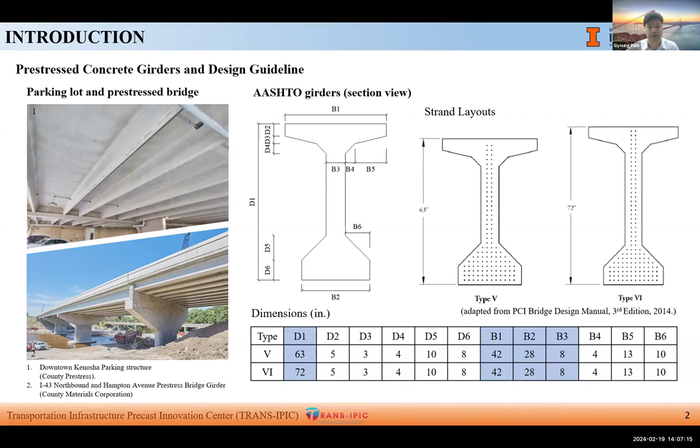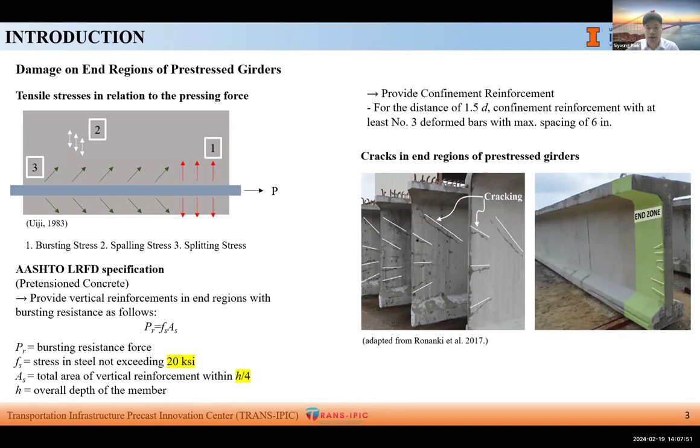However, even with securing this specification, we can still see inclined and horizontal cracks in the end region of pre-stressed girders. Several studies were conducted to mitigate end region cracking. The following 4 methods were developed as a solution.

First is to adjust the draping angle, and second is debonding strands with partial shielding, such as unbonded strands. Both methods showed some effect on the end region, by up to 20% less damage, but there was a reduction in shear capacity when conducting 2-point load experiments.

Third is vertical post-tensioning, and fourth is using vertical threaded rods. These methods also presented some effect on crack mitigation. However, extra steel components or bulky rods were required, resulting in steel congestion, especially in the end region.

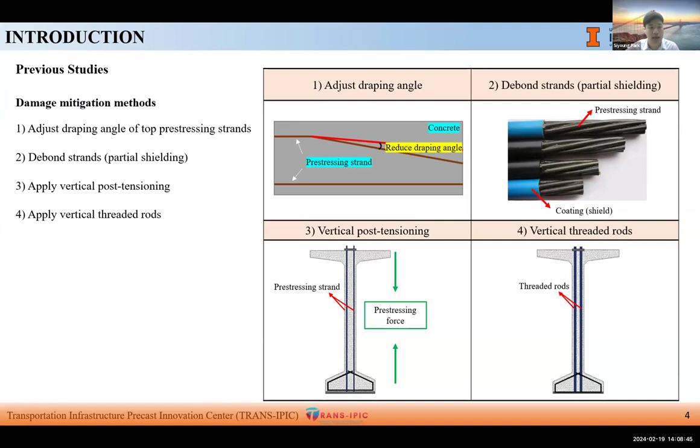In this study, the active confinement effect of SMA as a pre-stressing force was used for crack mitigation. It was thought that replacing steel stirrups with SMA stirrups can relieve crack damage by confining force, and even reduce steel congestion by using a smaller number of end region stirrups with larger spacing.

Nickel titanium niobium SMA alloy type was used for numerical analysis, which has a wide range of thermal hysteresis, resulting in beneficial effect for application in the civil engineering field.

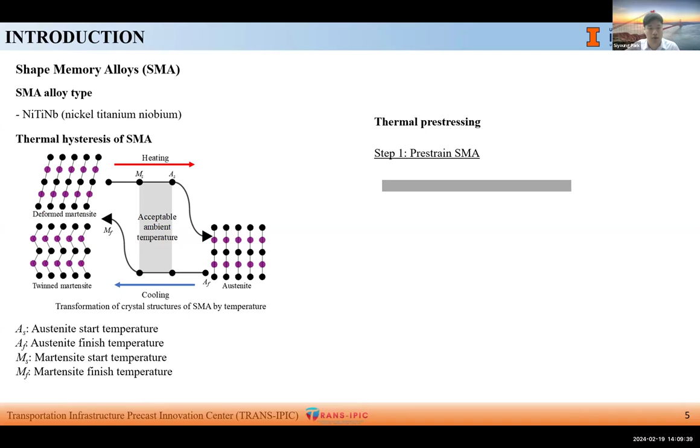Thermal pre-stressing is done by using the shape memory effect of SMA. This is where SMA tries to recover its original shape when heated up beyond the austenite temperature. Using this feature, as shown in the animation, we pre-strain the SMA and anchor it.

After that, by heating with direct heating or electric method, as the SMA is fixed to the anchor, it cannot recover to its original shape, building recovery stress. This confining or pre-stressing force would be transferred to concrete, limiting cracks.

Usually, direct heating is done by torch heating or placing in a heating chamber, and electric activation is done by applying low voltage activation.

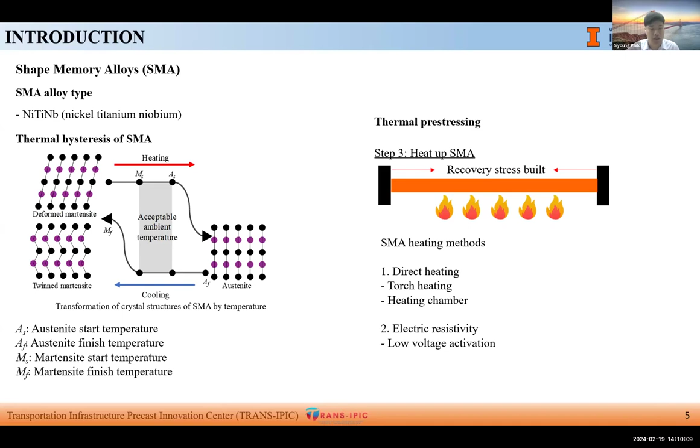Among diverse SMA types, nickel titanium niobium SMA was selected for the analysis. Nickel titanium niobium is composed of reversible particles nickel titanium and irreversible niobium.

This is that when the SMA is deformed and heated up, nickel titanium particles begin to recover, whereas niobium hinders its recovery. This reaction widens the width of thermal hysteresis, making ambient temperature upper than the martensite start temperature. While thermal hysteresis would maintain the recovery stress even in ambient temperature or below minus 70 degrees Fahrenheit, being capable for use in diverse applications.

With these features of SMA, it is already used in diverse engineering fields, including aerospace, robotics, cardiovascular science, and mechanical engineering fields. Representative applications are in airplane engine components, SMA actuators and pumps, and also artificial heart devices.

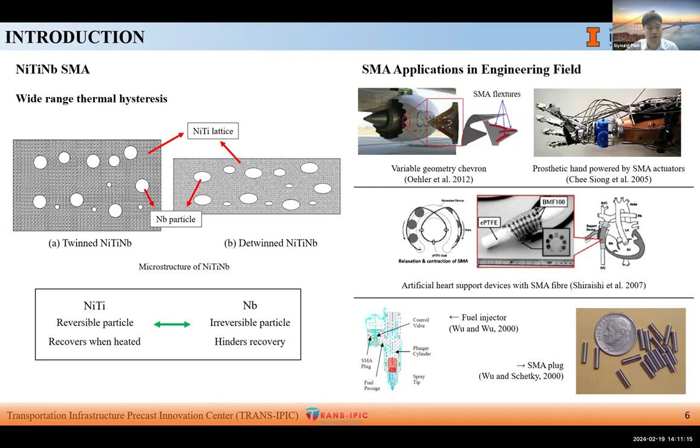Before applying SMAs, to verify the numerical model, a BT72 girder bridge model was designed based on the PCI bridge design manual. The length of the bridge was designed as 120 feet with end stirrups up to 18 inches, 36 straight pre-stressing strands and 12 draped pre-stressing strands were designed with 7 wire strands in a diameter of 0.5 inches, applying pre-stress of 202.5 KSI. All these stirrups and confinement reinforcement satisfy the recommendation of AASHTO LRFD specification.

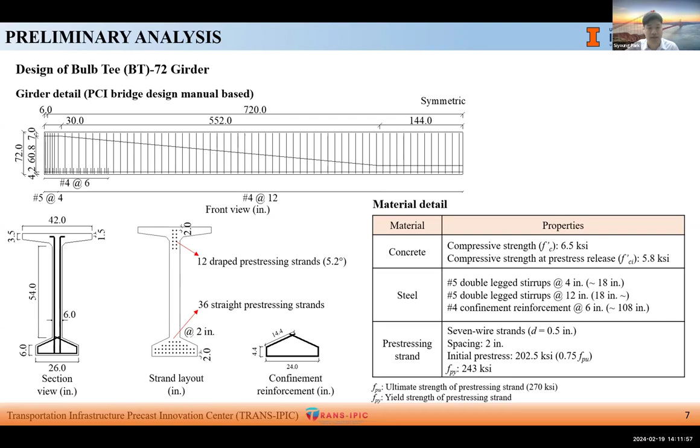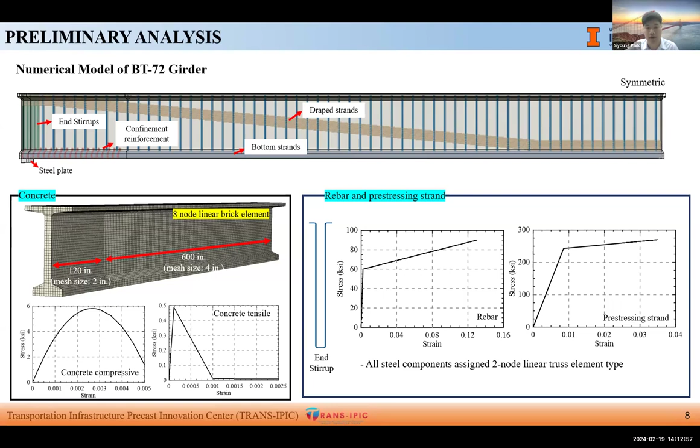Now, to evaluate the damage on the BT72 girder, the maximum principal strain of the end region was analyzed after pre-stress release. Red areas are those thought to be fully cracked. This was set based on twice the cracking strain value, which was also calculated based on ACI. As the pre-stress level increased, we can see crack regions developing in the web and flange areas.

When the pre-stress level was 101.3 KSI, there were only minor cracks on the surface of the web and flange areas. Still, the web-flange connection part was most damaged, with the crack shape in Y and horizontal form. As the pre-stress release level went up to 151.9 KSI, inclined cracks at the top web also appeared, evaluated to result from the draped pre-stressing strands.

The bottom flange was almost fully cracked in the end region where horizontal pre-stressing strands run through, and web splitting cracks also developed. At the end face with pre-stress of 202.5 KSI, the web region was cracked more than 50%, with a vivid cracking pattern of inclined, web splitting, and Y shape cracks.

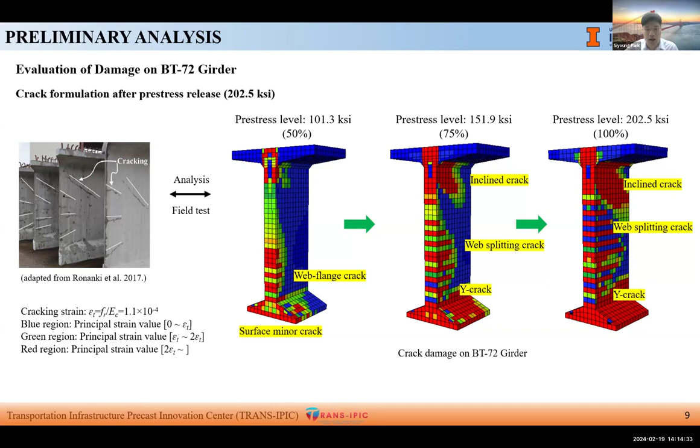Although this numerical model followed the AASHTO guideline, we can still see that end region cracking can be a problem. Also, by comparing to the field test, although the model is not the same, the cracking pattern was similar, verifying the numerical model.

The stress distribution along the vertical reinforcements at end regions was also evaluated to see if the BT72 girder satisfied the AASHTO guideline. Although the bursting resistance was satisfied, showing 2.1% against the code's 4%, the outermost stirrup exceeded the value in the middle and bottom of the girder, with values of 23.8, 24.1, and 20.2 KSI.

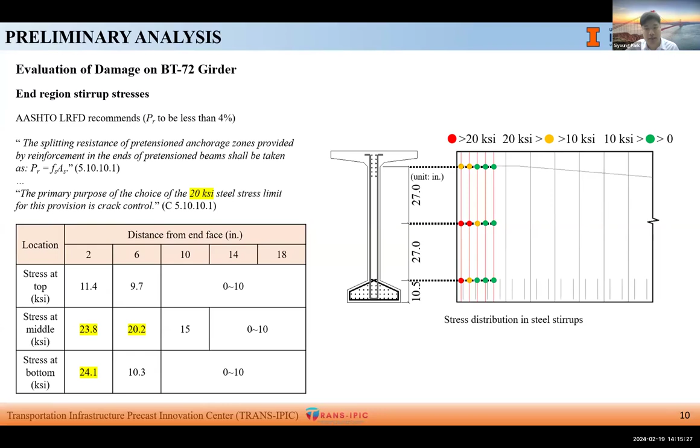However, after that, the stress diminished quickly, and after the third stirrup, the stress reached below 10 KSI. We can see that most stresses are distributed within the third layer, implying that these regions are really vulnerable to cracks. As a result, SMAs were placed within the third layer in further analysis.

Now, to start with the SMA model, whereas steel stirrups were designed in U-shape, SMA stirrups were designed in L-shape to mitigate stress concentration by pre-stress at the bottom flange. 3 types of SMA models were designed by changing the number of end stirrups: 5S2, 5S1, and 3S1 are cases with SMA stirrups. 5S2 had 5 end stirrups with 2 SMA stirrups at the end region, and the volume ratio was 1.66%.

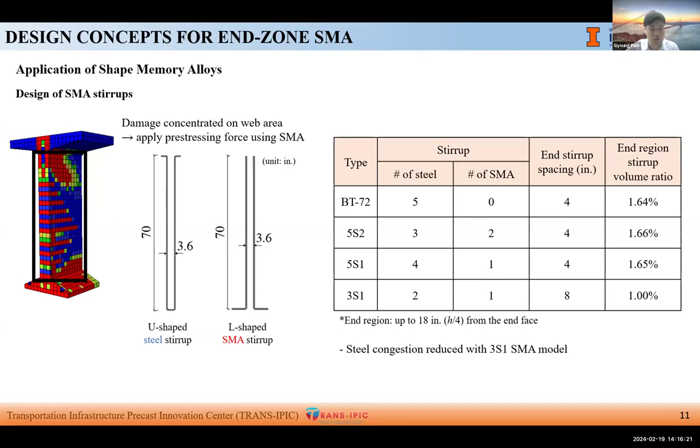5S1 also had 5 end stirrups, but with only a single SMA stirrup, and the volume ratio was 1.65%. Lastly, 3S1 had 3 end stirrups with only 1 SMA stirrup and a volume ratio of 1.0%. We can see that from 5S2 to 3S1, the volume ratio is decreasing with less amount of end stirrups.

To graphically see this, in the case of 5S2, 2 SMA stirrups were placed to mitigate the crack damage shown in the BT72 case. After that, the number of SMA stirrups was reduced to 1 to see the effect with a smaller amount of SMA. It would be best if we could replace a small number of SMA while sufficiently relieving damage. After that, the number of end region stirrups was reduced to 3 with 1 SMA stirrup, to reduce steel usage while limiting crack propagation.

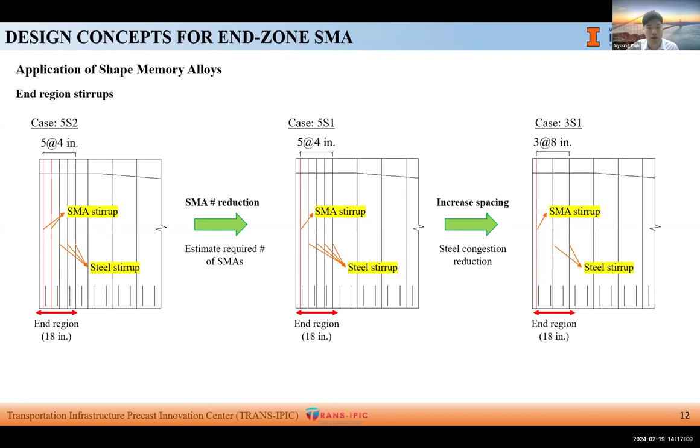In total, the original steel case and the three SMA cases were compared in terms of cracked area, cracked width, principal strain, and stress distribution in end stirrups.

The effect of SMA was analyzed in terms of cracked area at the web region. Most of the pre-stressing effect was with horizontal cracks, and there was slight effect with inclined cracks. By calculating the cracked elements, the original BT72 model had 54.2% cracked area, whereas each SMA model had 23.7, 33.3, and 33.4% cracked areas.

Placing 2 SMA stirrups had the best effect, but with a single SMA, it was also effective. If we observe the web center region only, most of the horizontal cracks were diminished even by applying just 1 single SMA stirrup.

Even with larger spacing of 8 inches, this was similar. It can be thought that the difference of cracked area of 23.7% to 33.3% was in inclined cracked area, and since there was no difference between 5S1 and 3S1, it was promising that SMA could truly relieve both crack propagation and steel congestion.

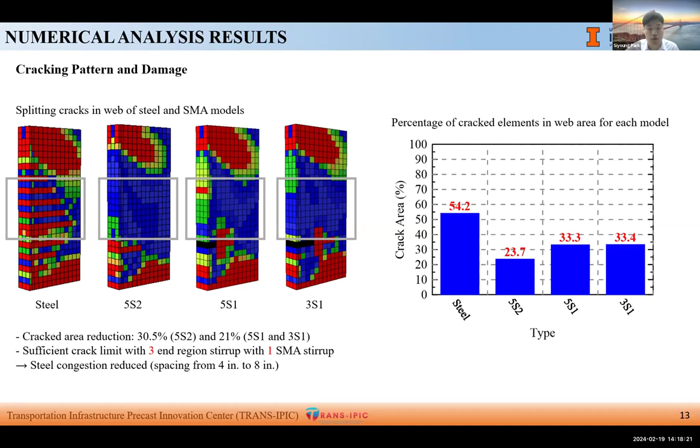Now to compare the crack width in each model, at the surface of BT72, the crack width exceeded 0.007 inches until approximately 0.75 inches. In ACI 224R, it recommends crack width to be below 0.007 inches to resist deicing chemicals in reinforced concrete under service loads. As generally, clear cover of reinforced concrete, and also for this model, is taken as 0.5 to 0.75 inches, this could bring negative influence to girders by steel corrosion.

However, with replacing SMAs, the crack width reduced to below 0.005 inches at the surface, and after passing the SMA stirrup at a distance of 2 inches, it was nearly sealed. With analyzing cracked area and crack width, we could find that applying SMA in pre-tension girders could prevent extensive cracking and improve serviceability.

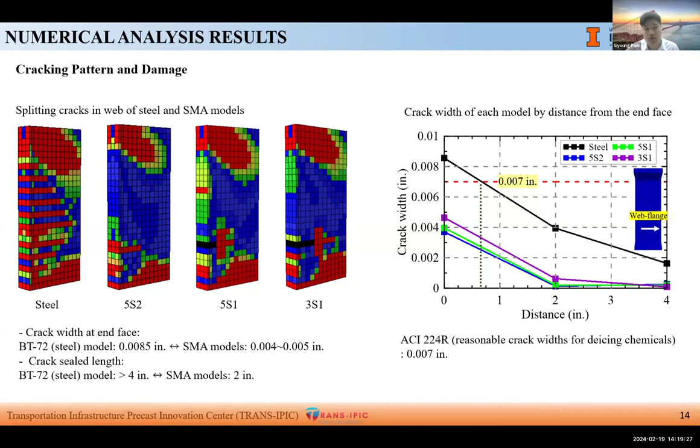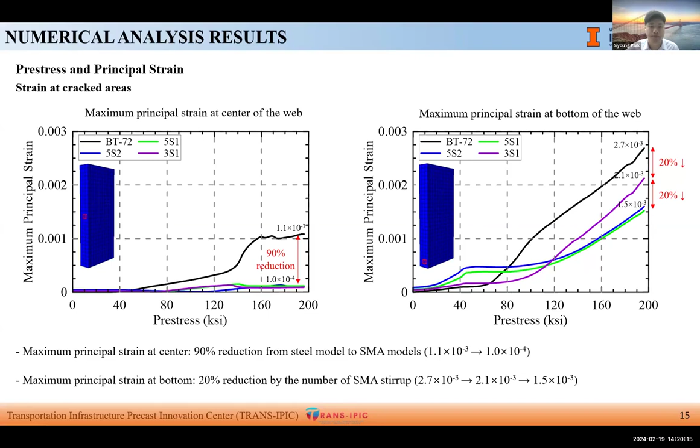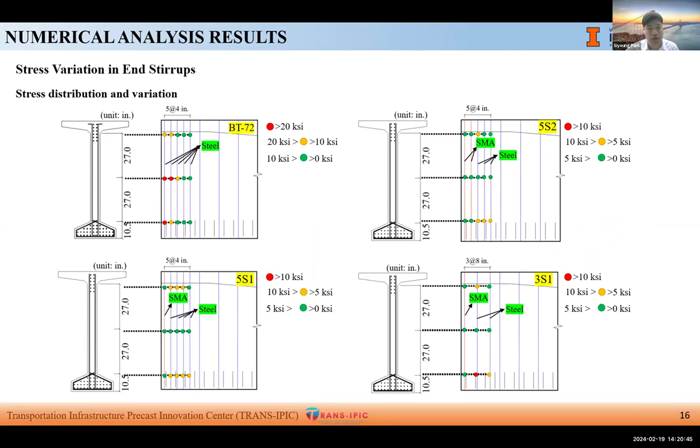Finally, by inspecting stress distribution and variation within end stirrups, the variation of stresses with SMA models were mostly below 10 KSI. The maximum stress variation was at the 3S1 case with 10.4 KSI due to its large spacing of 8 inches. Still, the value was under 20 KSI and even lower than stress generated in the BT72 model at equal locations. As per AASHTO codes, the demand of stirrups at the end region can be reduced with using SMA stirrups.

Now is the ongoing experimental program that we are working on. To validate the effect of SMA bars at end regions, a scaled down AASHTO type 1 I-beam was set as a reference model, placing a single pre-stressing strand at the web region. Web width was designed to be 3 inches, and pre-stress value was also set as 202.5 KSI. By comparing steel and SMA stirrup models, we are expecting crack mitigation and possibly future load tests can be done.

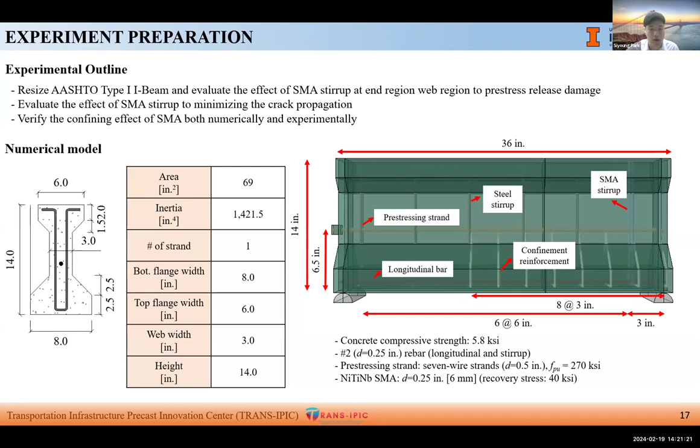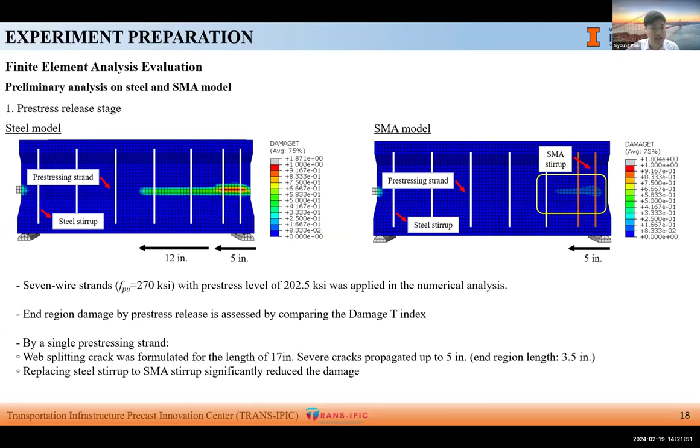Preliminary numerical analysis was performed in the scaled-down model as seen in the figures. Focusing on the crack at the web, we could see significant effect of crack mitigation in length and width by applying only 2 SMA stirrups at the end region. By referring to the results, the SMA effect was proven, and we are now in progress for experiments with diversifying variables such as number of SMA stirrups, SMA activation method, and the location of SMA stirrups.

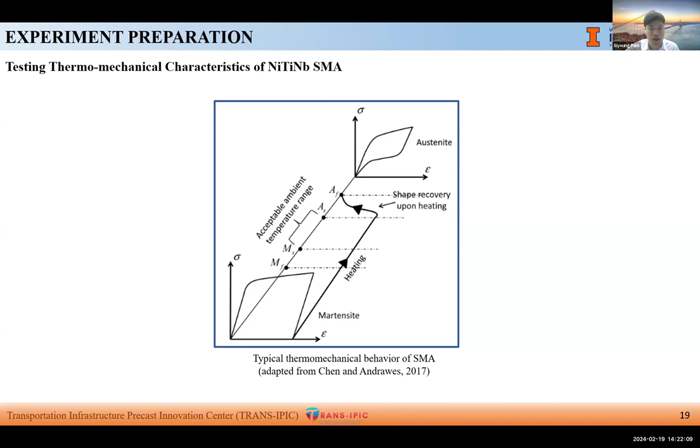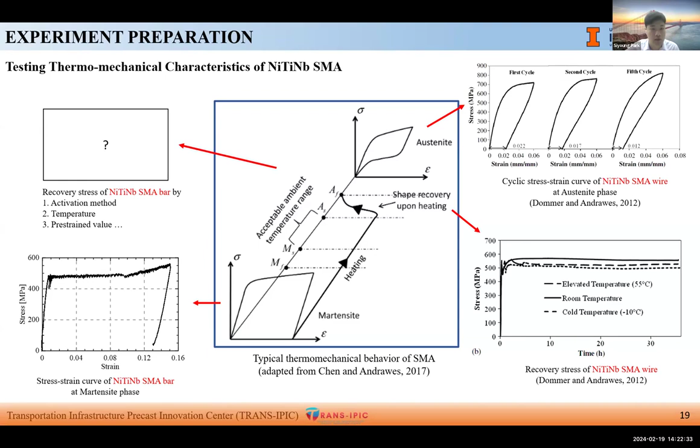The thermomechanical characteristics of nickel titanium niobium SMA is also under investigation. As SMA has different attributes by temperature, monotonic and cyclic testing are in progress. There was a previous study of nickel titanium niobium SMA wire in austenite phase in terms of pre-straining and activating. Now we are focusing on the martensite phase, for early activation from martensite phase to austenite phase. Activation method, temperature, and pre-strain value can be variables for determining the recovery stress, which should have an effect on the concrete, so these studies are going on.

To summarize, replacing steel stirrups with nickel titanium niobium SMA stirrups reduced crack area in the web by up to 55%. Horizontal cracks were mostly eliminated by pre-stress force of SMA stirrups. Single SMA stirrup also showed effect on crack mitigation while alleviating steel congestion issues. 20 to 40% of maximum principal strain was reduced by SMA stirrups. Crack width was limited under 0.007 inches by SMA stirrups, and experiments will be done to verify the numerical analysis results and investigate the thermomechanical characteristics of nickel titanium niobium SMA.

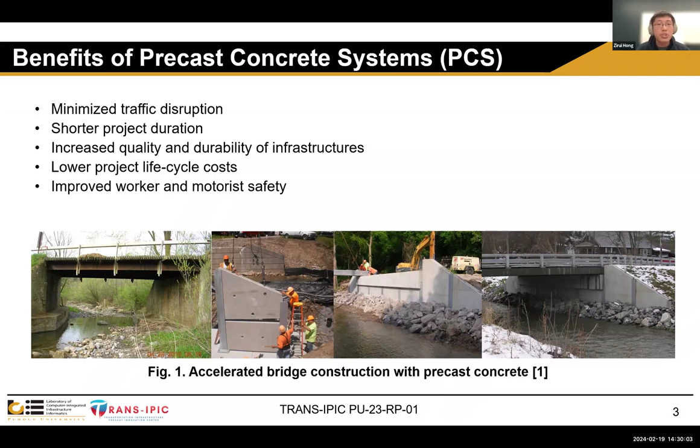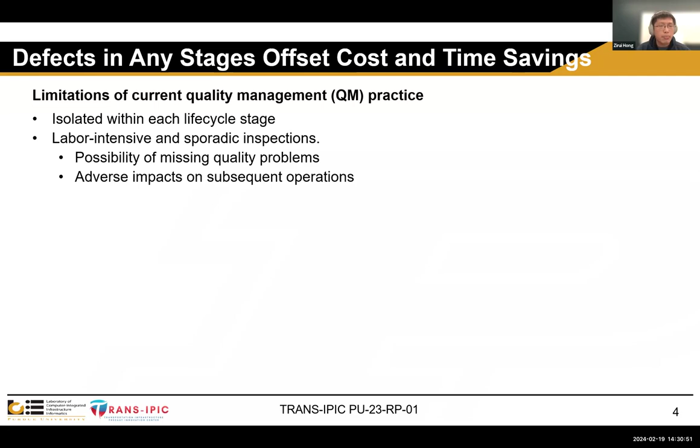However, the defects that occur in any project life cycle stage can offset the mentioned cost and time savings. The current quality management practice is limited in dealing with those potential defects in mainly two aspects. First, the current practice is isolated within each lifecycle stage, and data loss can happen when the project moves to the next stage. Second, the current practice heavily relies on labor-intensive and sporadic inspections, which could miss important quality problems.

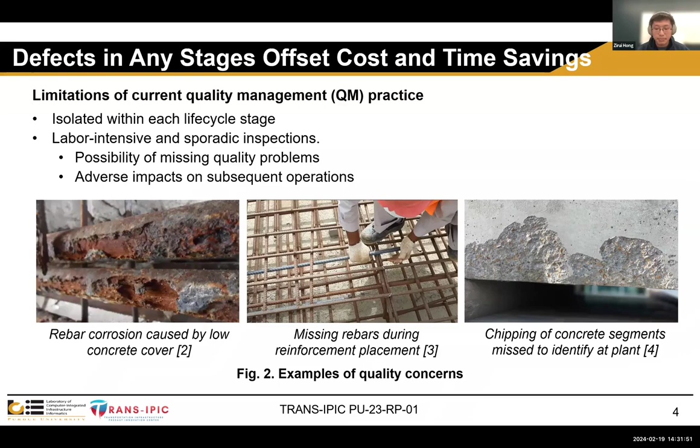So the limitation of the current QM practice reveals a critical need for a holistic quality management for PCS from a life cycle perspective. And BIM is considered as a solution for this holistic PCS QM. As we all know, building information modeling is a promising technology to facilitate information communication.

As we can see in this figure 3, the traditional quality management practice can experience data loss during project stage transitioning, and BIM can address the problem with its standard storage of data and seamless exchange of information or knowledge. With the progression of the project, it can enable a continuous accumulation of quality knowledge for quality management decision making. However, we should know that BIM only works as a data communication hub, but doesn't take care of the data collection part.

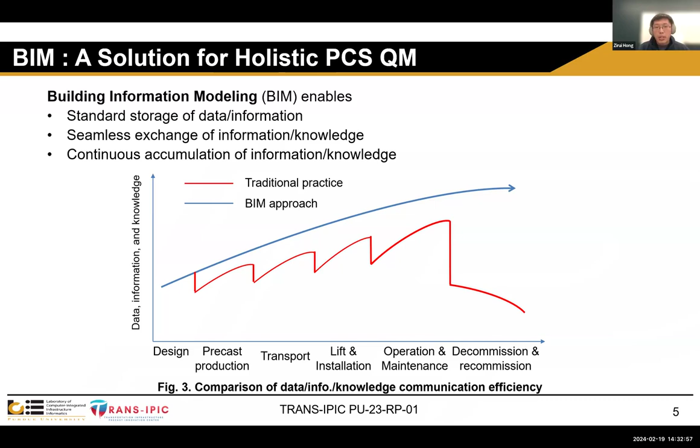So that is the place where sensing technologies come into play. Using sensing technologies such as the laser scanner and the ground penetrating radar can automate the laborious inspection tasks, which could reduce the possibility of missing those quality problems. It can also help improve worker safety by not exposing the workers to physical hazards.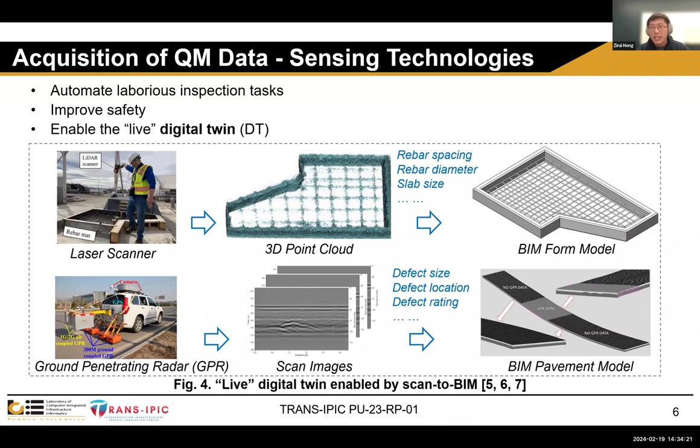By combining BIM and sensing technologies, the idea of scan-to-BIM can let us achieve a live digital twin of the transportation infrastructure for intelligent and effective quality management. Taking the laser scanner as an example, we can use it to collect 3D point cloud data of the forms and the rebar mats, and we can use algorithms to extract the dimensional data of these elements to analyze dimensional tolerance, and store this data to an up-to-date BIM model as a digital twin for the PCS QM.

Based on this background, our overarching goal of this project is to develop, validate, and test a holistic quality management framework as a model for precast construction of transportation infrastructure. As you can see in this figure 5, we can utilize BIM, sensing technologies, and deep learning algorithms to generate a live digital twin of the infrastructure for continuous monitoring of the quality.

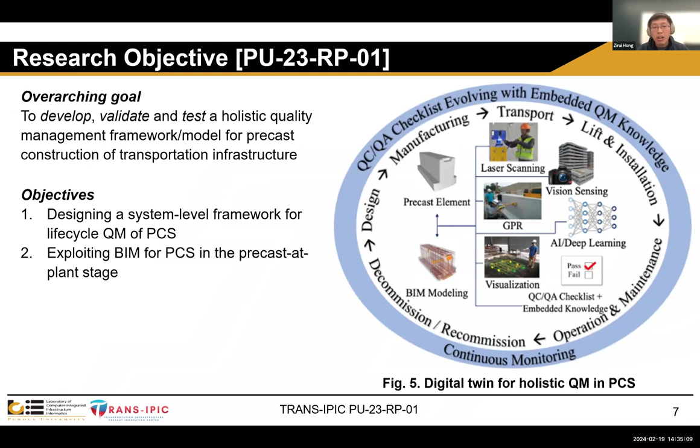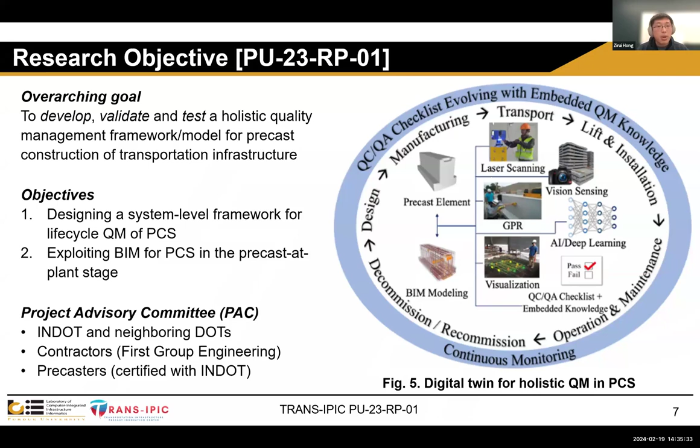To achieve the goal, we break it down into two objectives. First, we design a system level framework for lifecycle QM of PCS. Second, we exploit BIM for PCS at the precast plant stage. In this project, we established a project advisory committee, composed of people from INDOT, contractors, and precasters, to help us disseminate the project findings into practice.

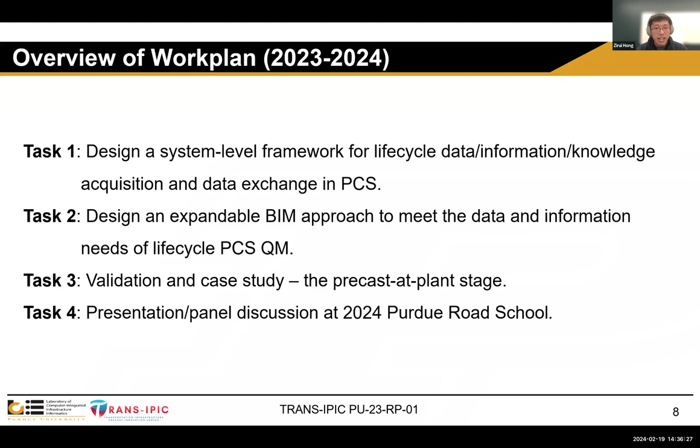This slide shows an overview of our project work plan. In task 1, we will design a system level framework for lifecycle data acquisition and data exchange in PCS. In task 2, an expandable BIM approach is designed to meet the data and information needs of lifecycle PCS QM. We will validate the design framework and approach using a case study targeting the precast at plant stage. We will also hold a panel discussion at the 2024 Purdue Road School to exchange ideas, share project findings, and hear from experienced researchers and practitioners in the field.

In the next slides, I will show you more details about tasks 1 and 2 and how we implement them. In task 1, we investigate and compare both the current practice of PCS QM and also the state of the art of BIM practice in PCS QM. For the current practice, we focus on these critical aspects.

For example, the timing of the QC/QA tasks, the involved stakeholders, the data collection methods they use, the tools, data needs, formats, and so on and so forth. And for the BIM practice, we look into how BIM changes the traditional work process and data flow, as well as how we can integrate sensing technologies into the workflow to improve the QM work.

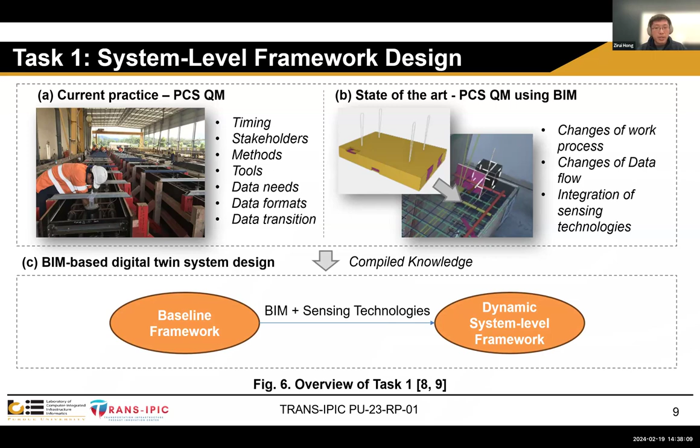We compile all the knowledge into two frameworks. We have the baseline framework, which describes the workflow, the work process of the current practice. Then based on this baseline framework, we integrate BIM and sensing technologies and establish a dynamic system level framework for the digital twin system design. Let me show you more details about how this dynamic system level framework looks like.

As you can see in figure 7, it shows this dynamic system level framework and how it is characterized by the expandable BIM models with the development of the project. So we probably could not have too much quality information about a PC column at the production stage, but with the progression of the project, the level of development of the BIM models increases, and we could have more as-is information.

For example, the physical damage status of the column come in and collected those data in the O&M stage.

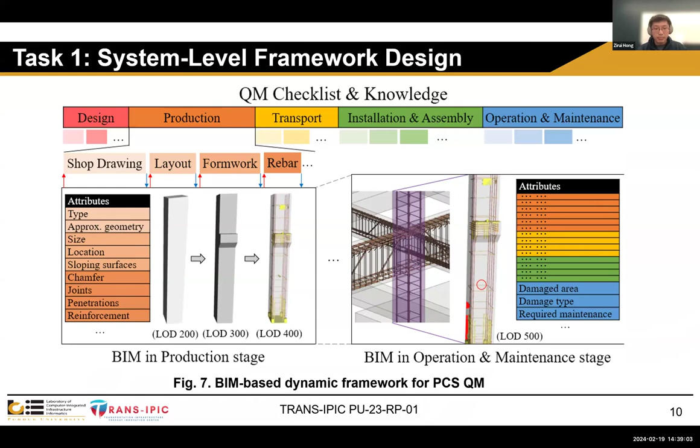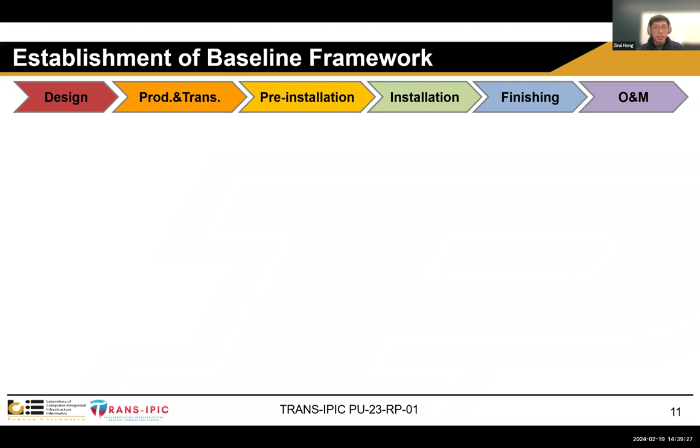In our project, we first target how to establish a baseline framework. We take the precast concrete pavement system as an example and examine the latest manuals and specifications to compile the current practice knowledge. We organize this knowledge by following this breakdown structure. For each life cycle stage, we identified the QC/QA tasks and the timing and responsible parties. Then we look into the specific checklists and check items, and organize those check items in a format of object attribute structure for the later BIM template design purpose.

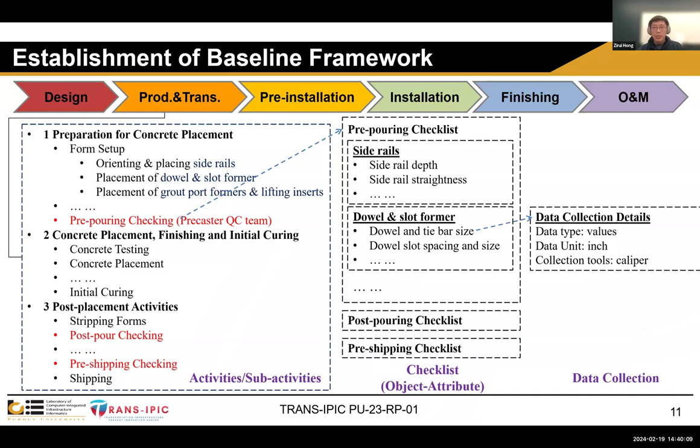We also look into the data collection details for each check item. For example, what's the data type, data unit, and collection tools.

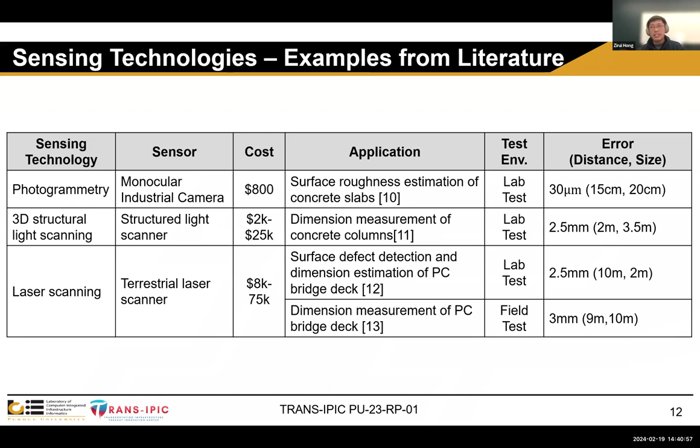To investigate the state-of-the-art of BIM practice, we comprehensively reviewed existing sensing technologies used for automated inspection tasks. We focus on important aspects to understand how BIM can change the traditional inspection workflow. For example, the sensors, the technology used, the money cost, and the application in inspection, the tested environment, and most importantly, the measurement accuracy of these sensing technologies.

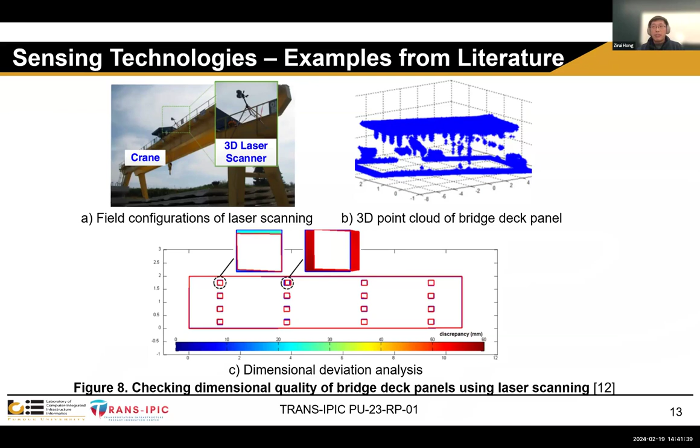Here's an example, a graphical illustration of one of the sensing technologies: we can utilize laser scanning to check the dimensional quality of bridge deck panels. We can collect the 3D point cloud data of those panels on the field and compare it with the as-designed models to conduct a dimensional deviation analysis and determine whether the dimensional tolerance is satisfied or not.

In task 2, we focus on designing expandable BIM templates using IFC. IFC refers to Industry Foundation Classes, which is an open international standard to digitally communicate data in the AEC industry.

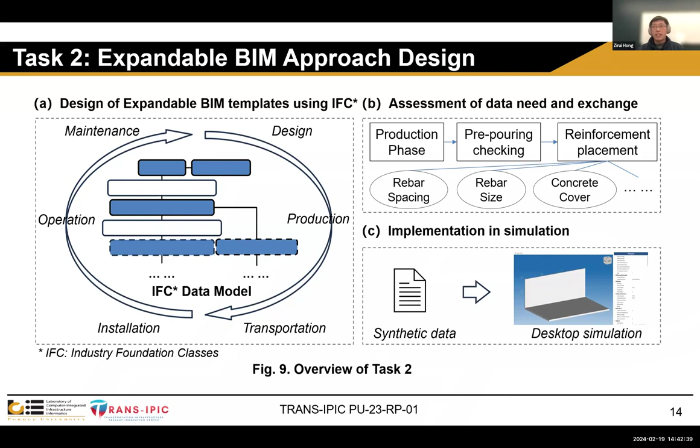Our goal is to have an expandable IFC data model that can accumulate quality data throughout the life cycle of the project. During the design, we will assess the data needs and exchange to improve the design, and we will implement our design with synthetic data in a desktop simulation, which involves the production operations at the plant.

In our project, we aim to answer two key research questions regarding the IFC representation. First, how to extend the IFC data schema to describe diverse PCS-QM concepts. Second, how to design IFC data structure to document the quality management history and support downstream analysis.

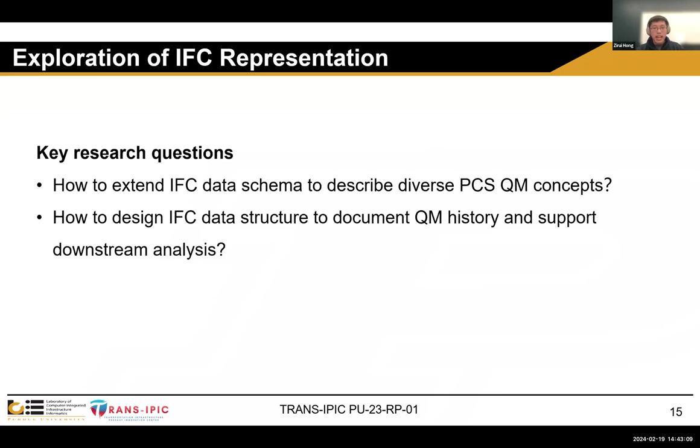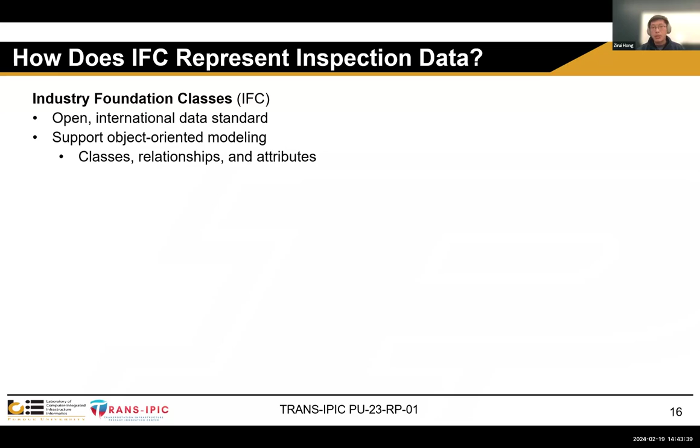This slide explains how IFC can represent the inspection data. IFC, as I mentioned, is an open international data standard, and it describes concepts in an object-oriented manner. In other words, it uses classes, relationships, and attributes to describe those concepts. In IFC data schema, it has numerous built-in entities: class entities, relationship entities, and attribute entities.

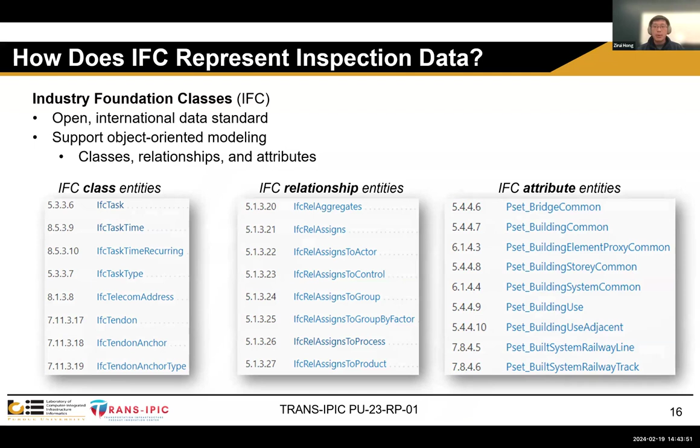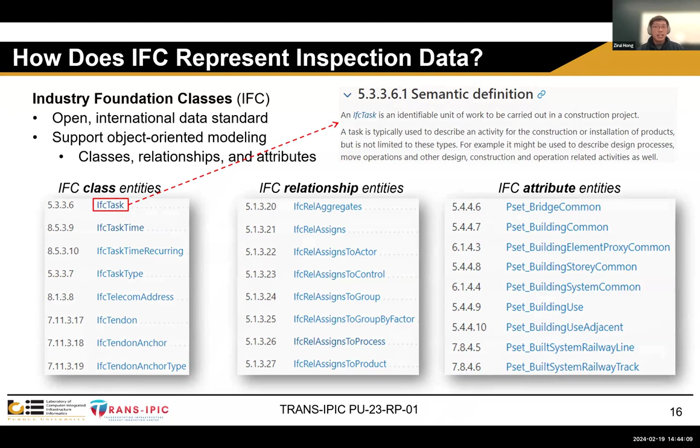Each entity has its own specific defined semantics for us to describe specific concepts, and we can find that information in the existing online IFC specifications. Let me give you an example to understand how we can represent a real-world inspection scenario using IFC.

For example, we could have a QC inspector conducting an inspection task for the post-pour checking of the PC elements at the plant at a specific time. After the inspection, he or she could find a few cracks on specific slabs, and the inspector has to record the properties of those cracks. For example, the properties can include width, location, and severity, etc. The inspection results need to be summarized.

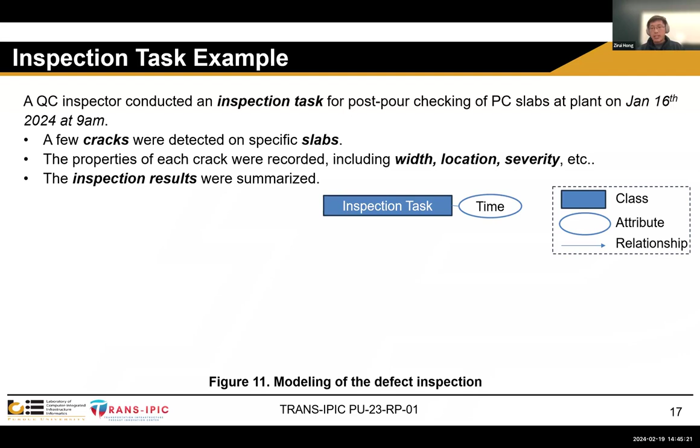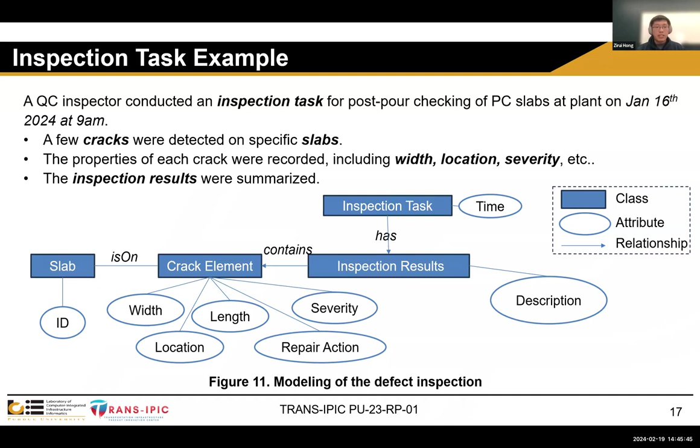We will use object-oriented modeling to first model the defect inspection. We could have a class called inspection task. The task has the time, and also has the results with its description. In the results, we can find the detected crack elements, which have multiple attributes like width and length, and each crack element is found on a specific slab, which has its own ID.

Here is how IFC represents the same inspection data. It uses a similar idea, but with IFC entities defined by the schema, so we could also have classes to define those concepts. Here, the red color text means the concepts we want to describe, and we could have the task, IFC task, IFC element assembly, IFC slab, and so on.

These class entities are connected with relationship entities, and each class entity also has some attributes. Those attributes themselves can also be class entities, for example the IFC task time. We can also add user-defined properties to describe the crack elements, using IFC property sets and property single values to describe attributes like length and repair action for these crack elements.

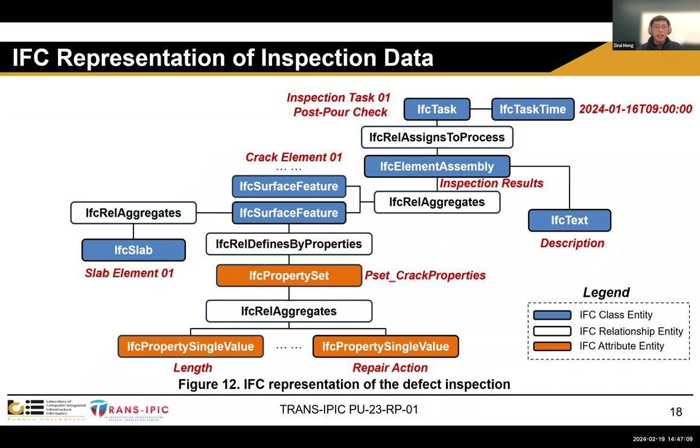And then we implement this example in a desktop simulation. We created IFC entities.

Sorry, is there any questions from the audience?

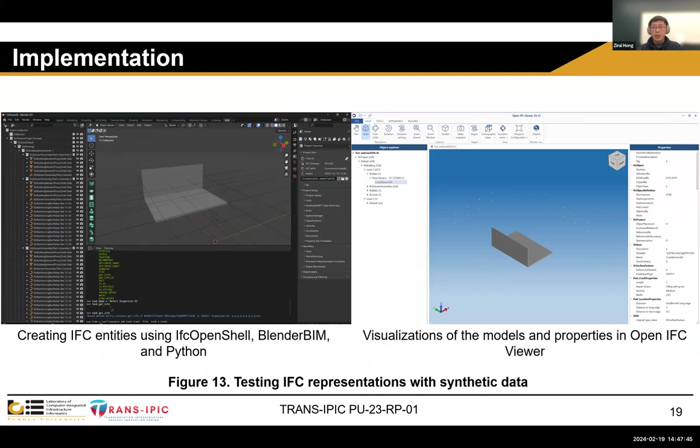We create the IFC entities using IfcOpenShell, Blender BIM, and Python, and we visualize those tested objects and attributes in another software called Open IFC Viewer. Here is the visualization result of those tested attributes.

We create an object called crack element 01 and attach it to the floor of type generic 12 inches. This slab has an ID, and the crack element has many user-defined properties, for example the crack properties and the location properties.

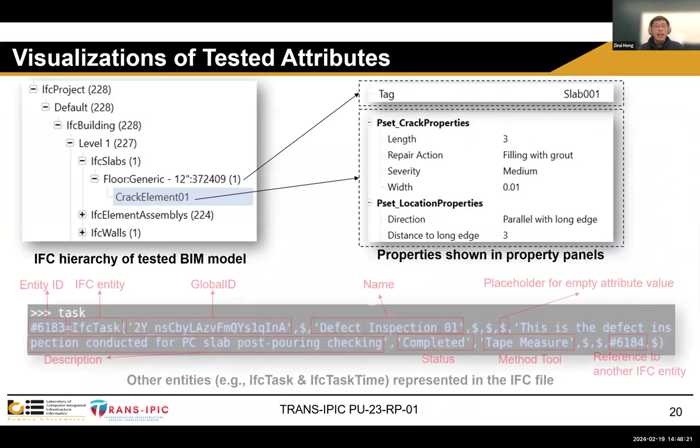And of course, there are some IFC entities we cannot visualize in current commercialized software at this stage. So I show an example of the IFC task entity here. It is a record from the original IFC file, and you can tell how the IFC files describe IFC entities. It starts with an entity ID and the entity itself, followed by a parenthesis containing many attributes, for example the global ID, name, status, data collection method tools, and so on.

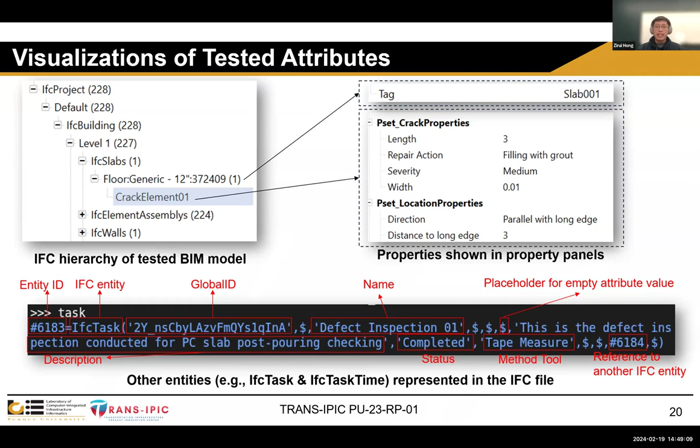So that's the implementation of our project. In the last page of my presentation, I want to share some findings. First, we found that IFC can be extended and customized to support the lifecycle quality management of precast concrete structures. Second, a complete history of quality management data integrated in IFC and BIM can lead to semantically rich digital twins for precast concrete structures. Last but not least, at the precast plant stage, non-buried sensing technologies automate the acquisition of dimension and surface quality data for the PC elements.

That's all the things I want to share with the audience. Thank you for your attention and listening. I will be happy to answer any questions if you have.

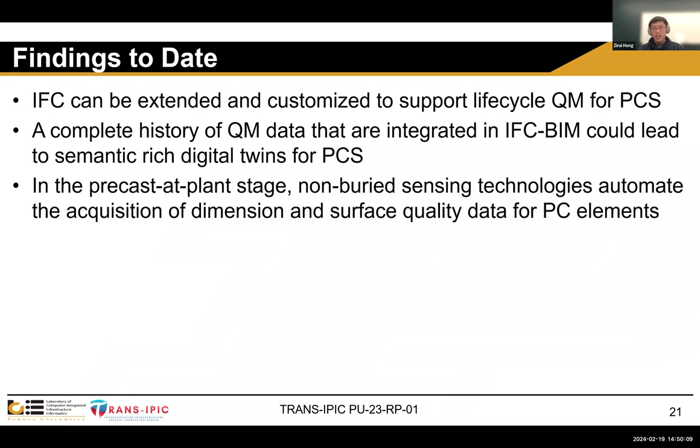Thank you, Zirui. Thank you. Very good presentation, really appreciate that. Time for questions. I have a question. Go ahead. I have several questions.

My first question, at the beginning you were showing the maintenance part. The slab is deteriorated or the rods are deteriorated. You can either replace it or put a new one. Did you do any kind of economic analysis on that? That which process?

Hello? Thank you for the question. Please correct my understanding if I'm wrong - you are asking if we have done any economical analysis using this IFC representation BIM template. The answer is we haven't done that yet. The project is still ongoing, and we are still testing how we can better design those BIM templates for the downstream analysis you mentioned, like cost estimate and economical analysis. So we haven't done that part yet.

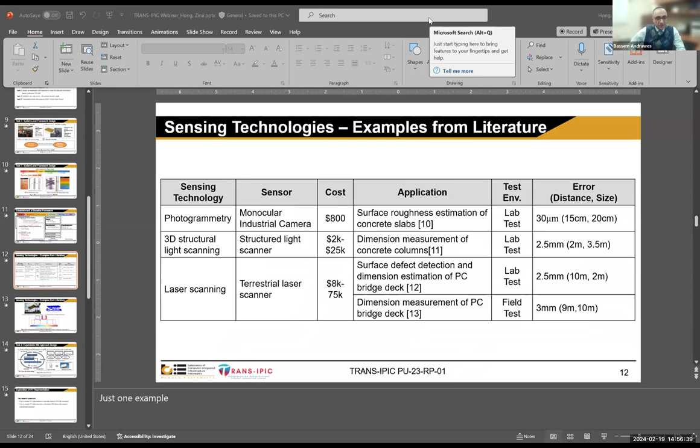Again, very excited that we had two excellent presentations today, and I like the questions so much because that's the whole point of having these webinars—to create some kind of interaction and maybe trigger new ideas and new directions of research. Our center is very diverse when it comes to precast concrete. You might say it's only precast concrete, but looking into the projects—about 18 projects funded so far by TRANS-IPIC just in the first year—they're all very diverse in how they tackle the issue of durability and extending the life of transportation systems, precast systems in particular.